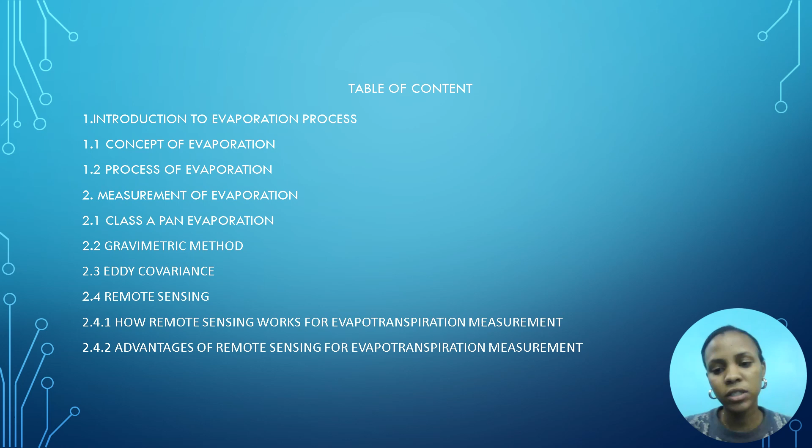As you can see, this is the table of contents of what we are going to talk about, including the introduction to evaporation process, concept of evaporation, process of evaporation, concepts. Let's rush and go to evaporation. Evaporation is a process by which water changes from liquid state to gaseous state. It occurs naturally in various environments, including bodies of water like lakes, rivers, moisture.

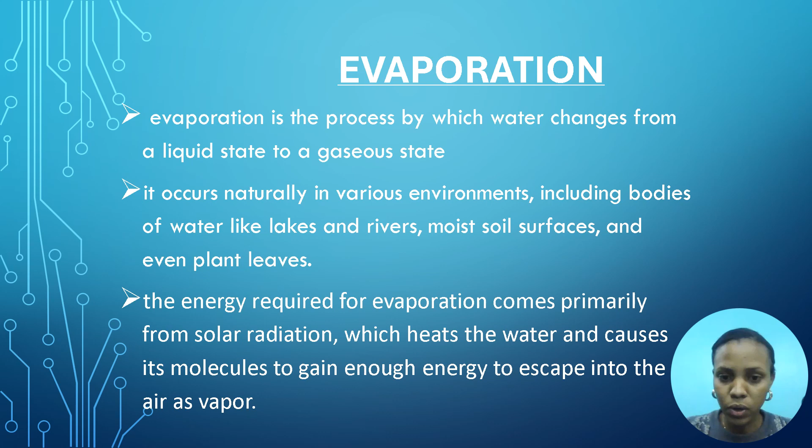As you see, this is the process of evaporation. As I was saying in the last slide, the process of evaporation goes like heat absorption. This is when the sun shines on a body of water, like lakes, rivers, oceans, the water absorbs heat energy from the sun, as that diagram was showing us.

And after this process, there is the process of molecular movement. As the water molecules gain energy, they move faster and become more kinetic. Becoming more kinetic, some of these molecules at the surface gain enough energy to escape from the liquid phase to become vapors, and as the result going up as vapors, and that was the concept of evaporation.

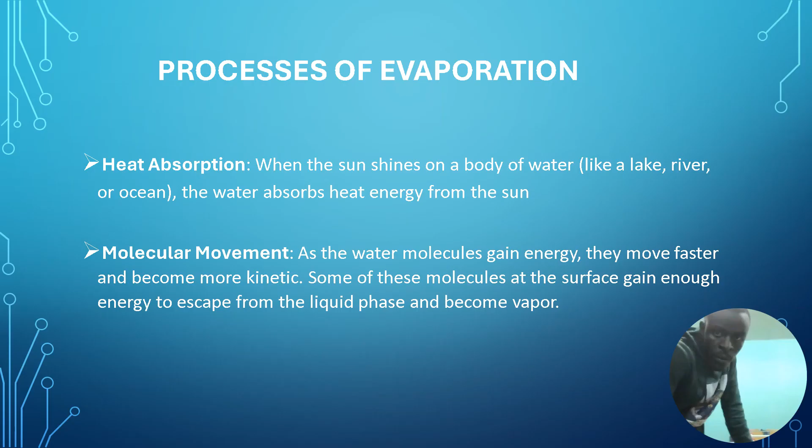I'm continuing to discuss the process of evaporation. So you've seen that the second step is the movement of water molecules. After the movement of water molecules, the third step is escape to the atmosphere. This is where vaporized water molecules rise into the atmosphere. The process of evaporation occurs not only from water bodies but also from moist soil, plants, and even our skin. Water molecules, after gaining energy, start to vaporize, and after becoming vapor, they rise into the atmosphere.

So the fourth step is the cooling effect. Interestingly, here we can see that evaporation has a cooling effect on the remaining water. How? As the high energy water molecules are leaving, the average kinetic energy of the remaining molecules decreases. This decrease of the kinetic energy of the remaining molecules results in a slight cooling of the water surface. So the remaining water surface becomes cooler.

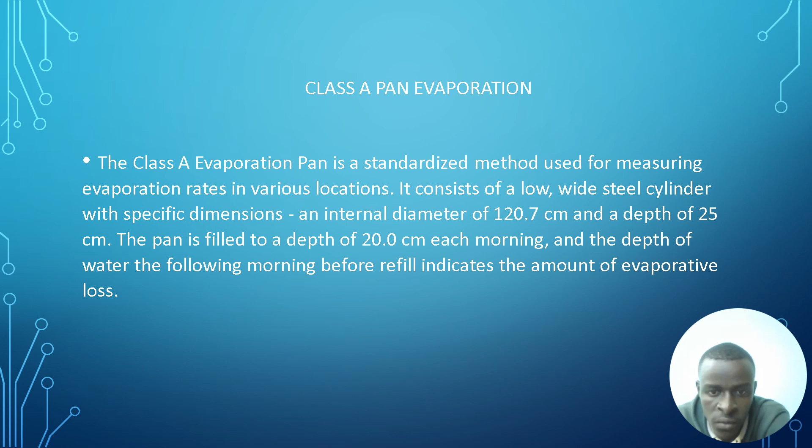And the pan is filled to a depth of 20 centimeters each morning. This is the amount of water put in your pan, and the depth of water the following morning before filling indicates the amount of evaporation loss. This means if you put in water and come back another day, you can see the amount of water that was lost.

As for industry application, class A pan evaporation measurement is used in industries that require water supply management. So in water supply management in industries, we use this method of class A pan evaporation. It can also be used in industries for hydrological research, wastewater management, mining water storage, and evaporative mineral collection industries.

So, features of this method: it is built to survive harsh environments, so it resists unpredictable or bad environments. Stainless steel construction means the tools used in this method are stainless steel. It meets Australian standards, is designed to limit vegetation and fauna, is easy to assemble and maintain, and it includes an automatic fill system. Its main feature is also its long operating life; it works over a long time.

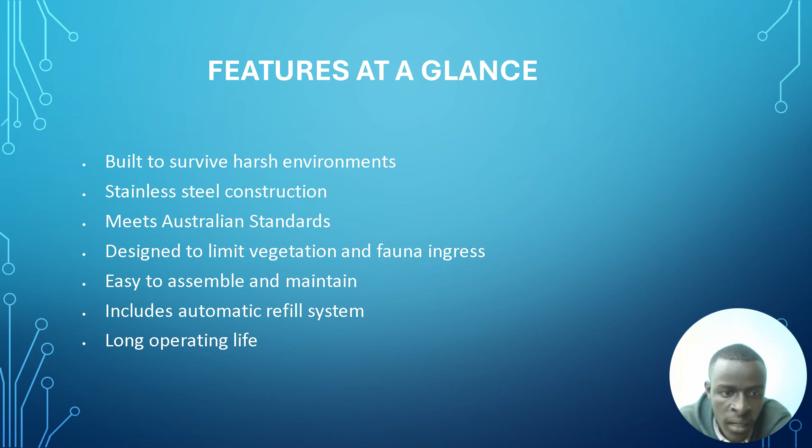So in detail, the Class A evaporation pan is designed to provide accurate and reliable measurement of evaporation rate. It is equipped with a highly sensitive water level sensor and an automatic fill system that ensures consistent operation.

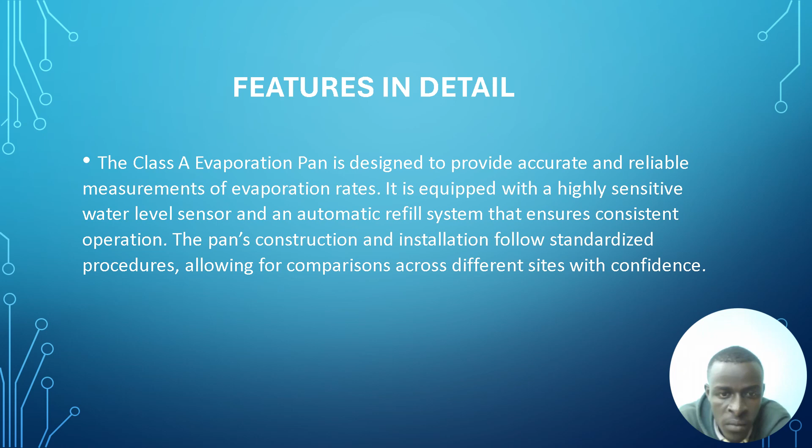Measurement. Another measurement after Class A pan evaporation is the gravimetric method. This is by weighing a container of water regularly and tracking the weight loss over time. Researchers can calculate the rate of evaporation using this gravimetric method. This method is crucial in various industries such as water quality testing, environmental analysis, chemical manufacturing, pharmaceuticals, medical devices, and electronics.

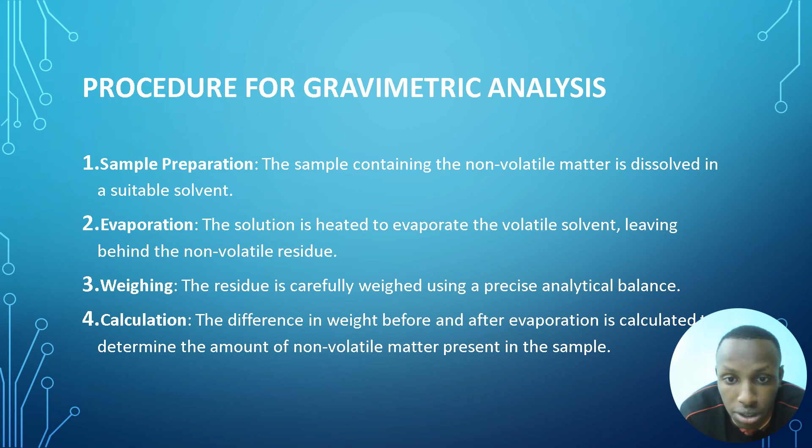We are going to talk about the importance of accurate weighing. Accurate weighing is critical in gravimetric analysis as it involves measuring tiny amounts of residue. A high precision balance with readability up to 10 or 1 micrograms is typically required for this purpose. Precise weighing ensures reliable results, and it helps in determining the purity of solvents, assessing cleanliness levels, and maintaining product quality standards.

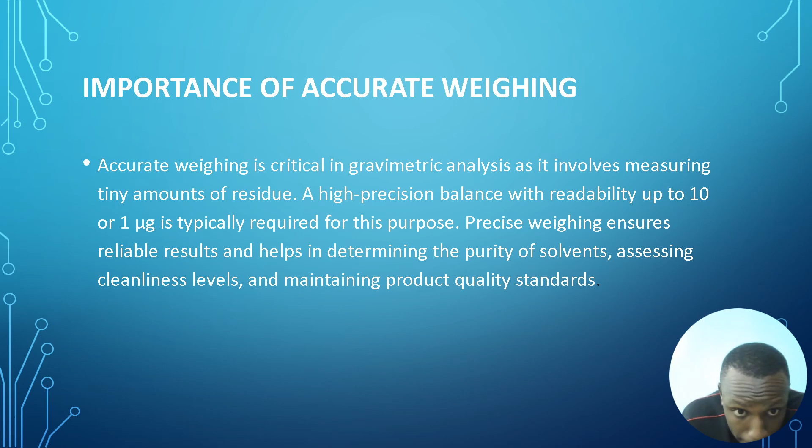Here are the advantages of the gravimetric method. The first one is high precision and accuracy in measuring non-volatile residues. Versatility across different industries and applications. Reliable results for quality control and compliance purposes.

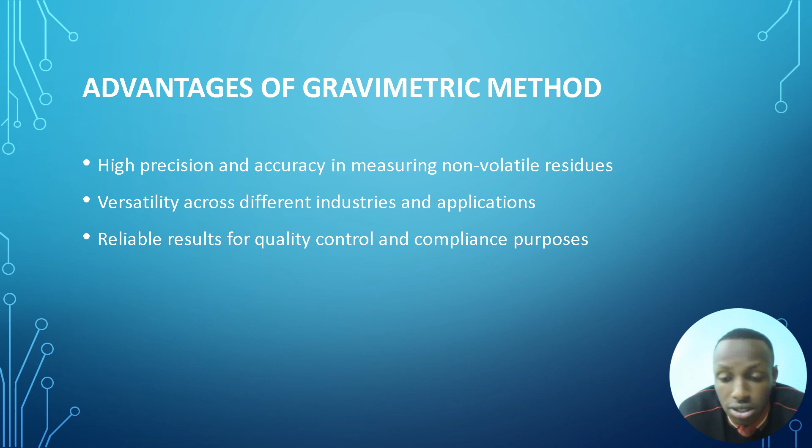Measurement of evaporation. Let me stop this measurement of evaporation by giving the third measurement of evaporation, which is called eddy covariance. This is an advanced technique using high precision instruments to measure the exchange of gases between the Earth's surface and the atmosphere, allowing for direct measurement of evaporation rates.

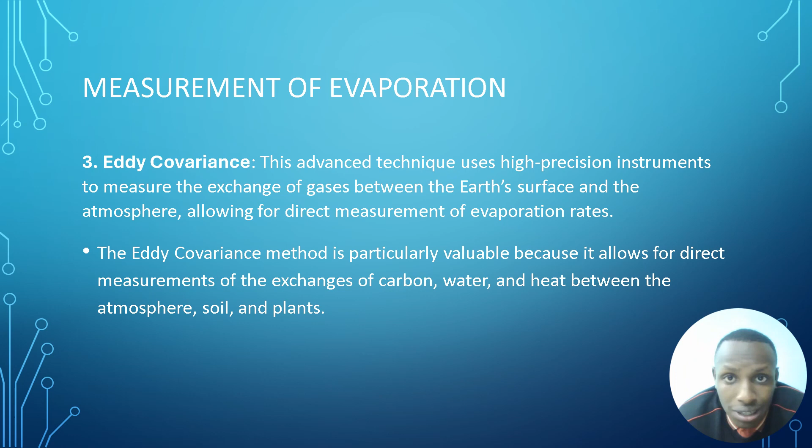The eddy covariance method is particularly valuable because it allows for direct measurements of the exchanges of carbon, water, and heat between the atmosphere, soil, and plants. Let me stop here.

My colleague will continue. I'm called Umhil Clements. I'm one of the members of Group 2. So let's continue the third measurement of evaporation, which is called eddy covariance.

Eddy covariance has some techniques. The eddy covariance technique involves calculating the covariance of the vertical wind speed and the fluctuation in the physical quantity being measured to determine the energy and matter fluxes caused by turbulence.

Another technique of eddy covariance: this method enables the measurement of small fluctuations over different time scales, hours, days, seasons, years, and spatial scales ranging from 100 to 2,000 meters. The technique has been established as one of the most effective approaches for studying ecological interactions between terrestrial ecosystems and the atmosphere.

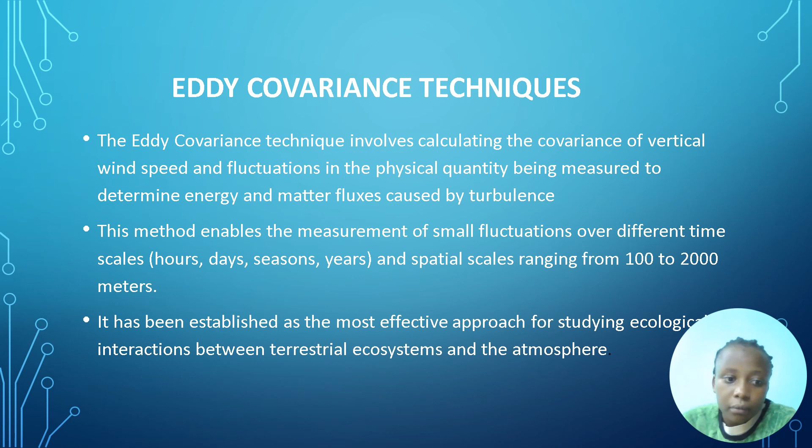The eddy covariance method has some advantages. The first advantage, continuous measurement: the eddy covariance method allows for automatic and continuous long-term measurement of evapotranspiration. Second advantage is non-intrusive: it minimizes the interference with the target measurement area.

The third advantage of the eddy covariance method is called spatial coverage. Eddy covariance provides average evapotranspiration measurement at the mesoscale level, between 100 and 1000 meters. The fourth advantage of eddy covariance is called flexibility. Evapotranspiration can be measured at any time and place using this method.

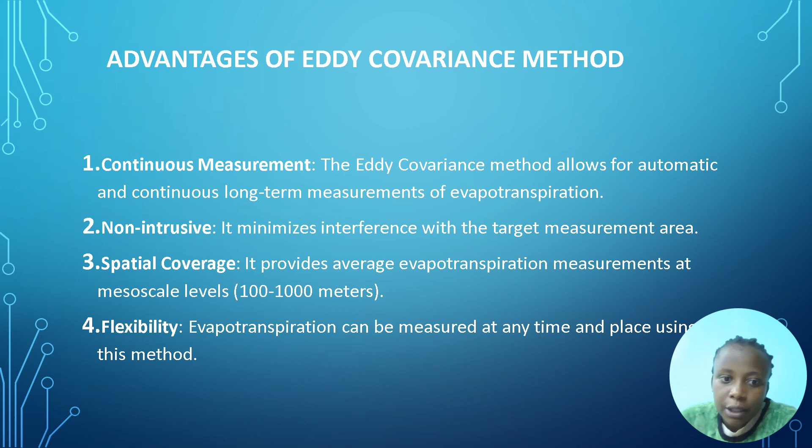The other measurement of evaporation is called remote sensing. Satellite-based technology can also be employed to estimate evaporation over large areas by analyzing surface temperature, humidity level, and other relevant data remotely.

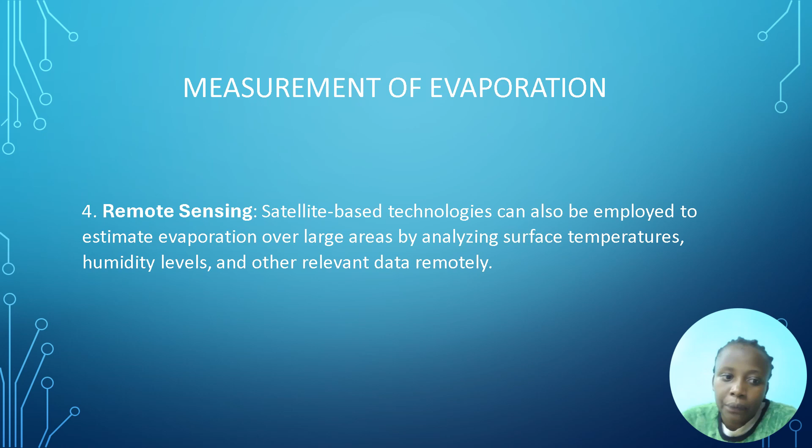Here we are going to see how remote sensing works for evapotranspiration measurement. First, data acquisition. Remote sensing instruments on board satellites or aircraft capture images of the Earth's surface at various wavelengths, including the visible, infrared, and thermal bands.

Another way remote sensing works for evapotranspiration measurement is called land surface temperature. By measuring thermal infrared radiation emitted by the land surface, remote sensing can determine the surface temperature, which is crucial for calculating

evapotranspiration rates. Another way remote sensing works for evapotranspiration measurement is called vegetation indices. Remote sensing can also assess vegetation health and density using indices like NDVI, the Normalized Difference Vegetation Index, which help in estimating transpiration rates.

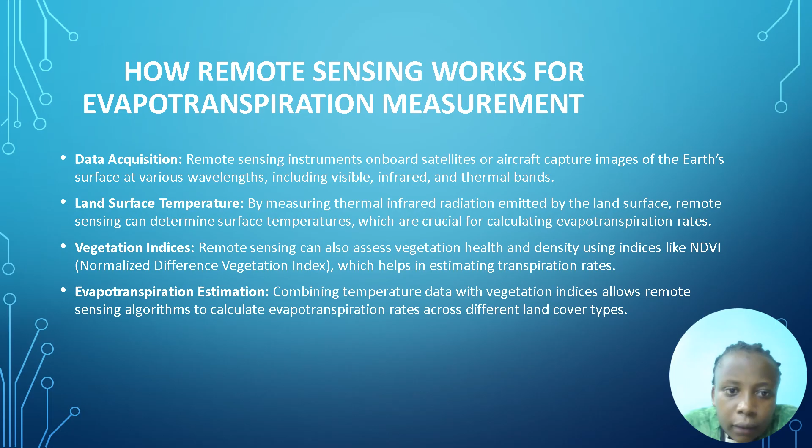Here we have the advantages of remote sensing for evapotranspiration measurement. The first advantage is called spatial coverage. Remote sensing enables assessment of evapotranspiration over large areas, providing valuable insights for regional water resources management. The second advantage of remote sensing is called temporal resolution. Regular satellite passes allow for frequent monitoring of evapotranspiration dynamics, aiding in irrigation scheduling and drought monitoring.

The other advantage is called non-invasive. Unlike direct measurement methods that require physical installation on the ground, remote sensing is non-intrusive and can collect the data remotely.

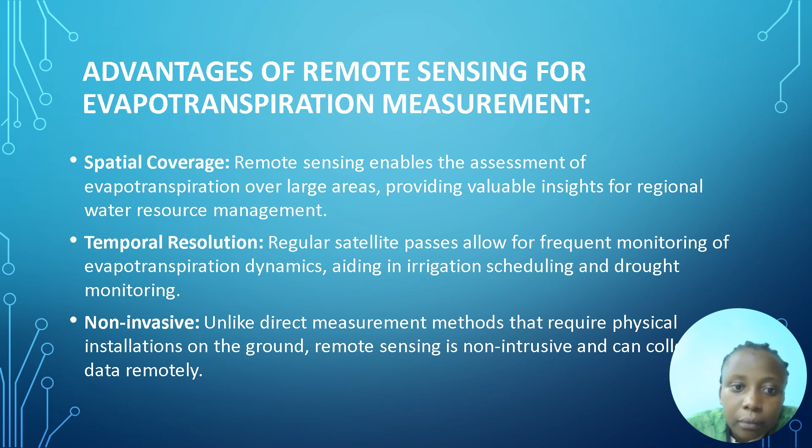Let's go to the role of evaporation in agriculture. Sorry. Evaporation plays a crucial role in agriculture due to its impact on water availability and soil moisture levels. Understanding evaporation is essential for farmers because of irrigation management, that's the first point. Knowing the rate of evaporation helps farmers optimize irrigation schedules, ensuring that crops receive adequate water without wasteful overwatering.

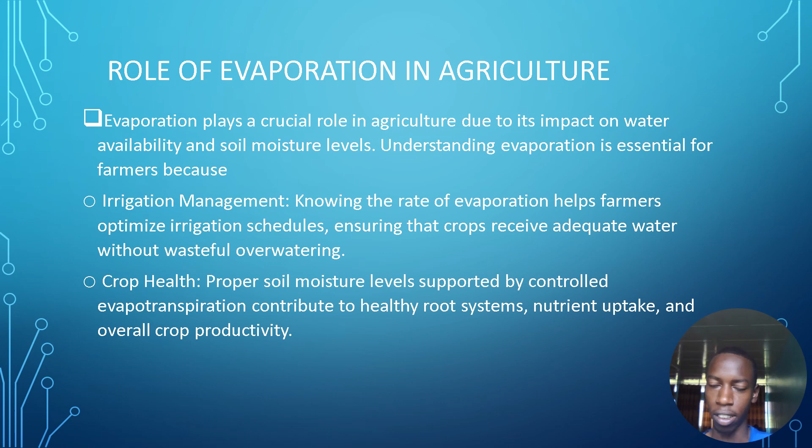The second is about crop health. Proper soil moisture levels supported by controlled evapotranspiration contribute to healthy root systems, nutrient uptake, and overall crop productivity. The next one is about drought preparedness. Monitoring evapotranspiration data enables farmers to anticipate drought conditions and implement effective water management strategies during dry periods.

And the last one is water stress control, whereby monitoring evaporation rates, farmers can adjust watering practices to prevent water stress in the plant, promoting better crop resilience.

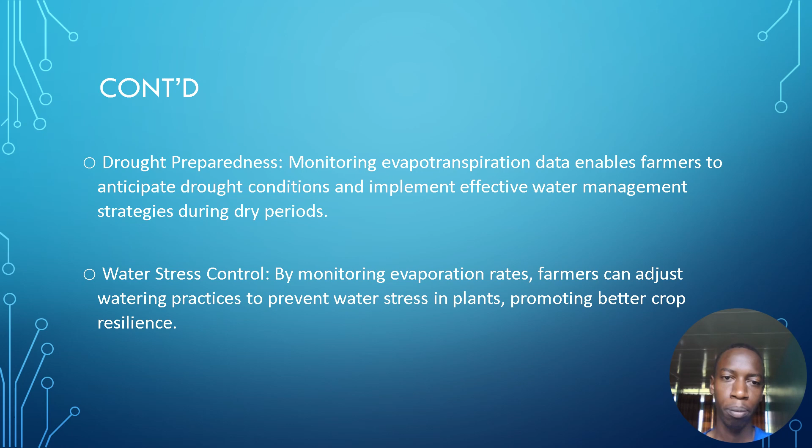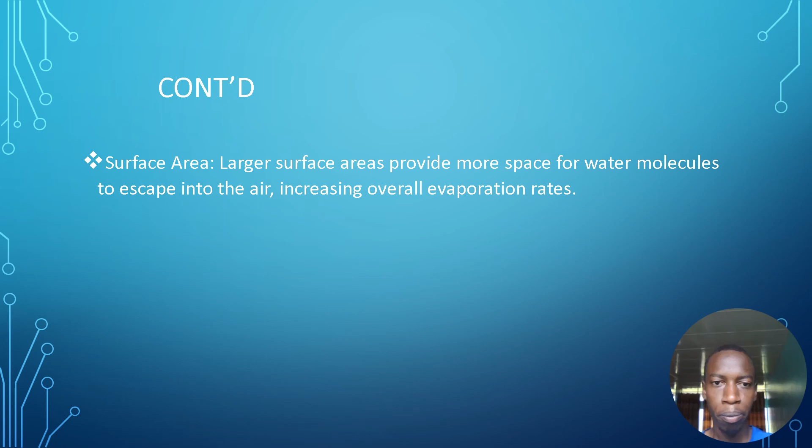Applications of evaporation. First of all, we have desalination, where evaporation is used in desalination processes where seawater is evaporated, leaving behind salts and impurities, thus producing fresh water. Secondly, we have the food industry, where evaporation is employed in food processing to concentrate liquids like fruit juices or milk by removing excess water content. Cooling systems. Here, evaporative cooling systems use the principle of evaporation to lower temperatures in buildings or refrigeration units.

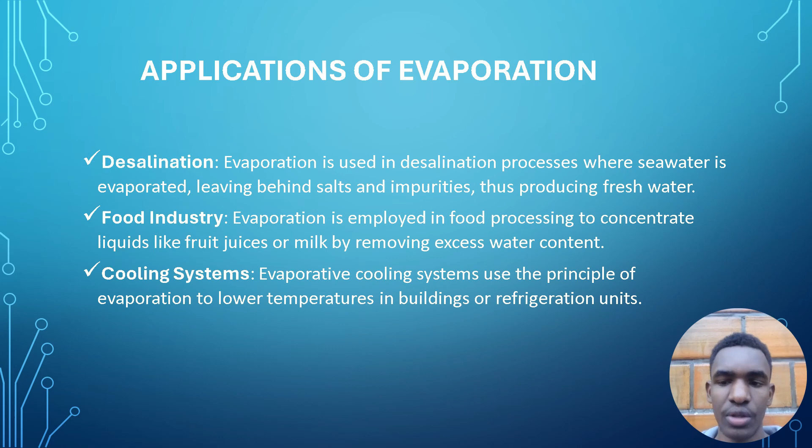We are going to continue with testing understanding. How does evaporation contribute to the water cycle and what role does it play in maintaining environmental balance? Secondly, as year 1 students who attend the ecology and climatology courses, how does evaporation affect ecosystems and biodiversity in different regions around the world? That is a question you can answer by yourself as you have studied it. Also, the third, simply try to explain the potential consequences of altered evaporation patterns on agriculture and food security globally. Also, you can answer that.

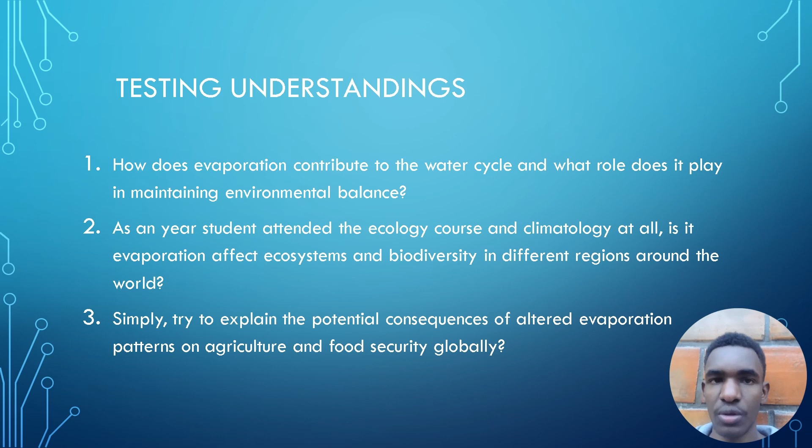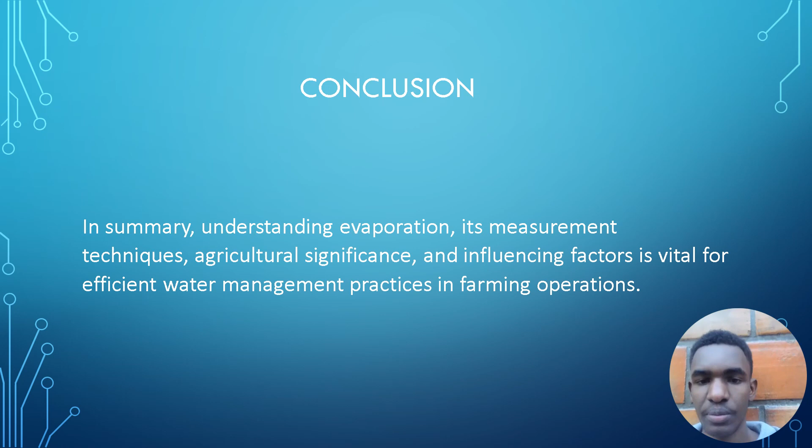As a conclusion, in summary, understanding evaporation, its measurement techniques, agricultural significance, and influencing factors is vital for efficient water management practices in farming operations.